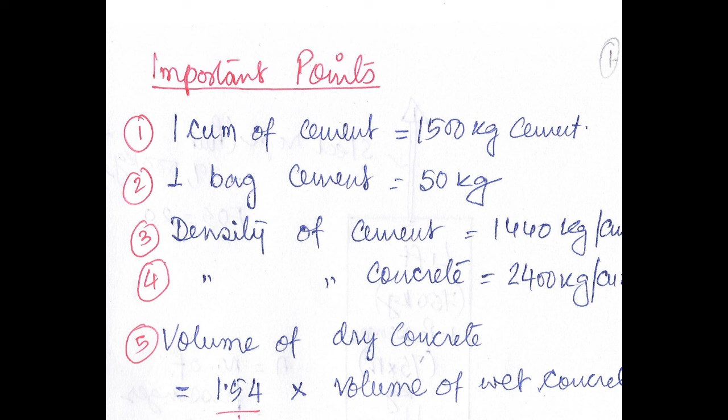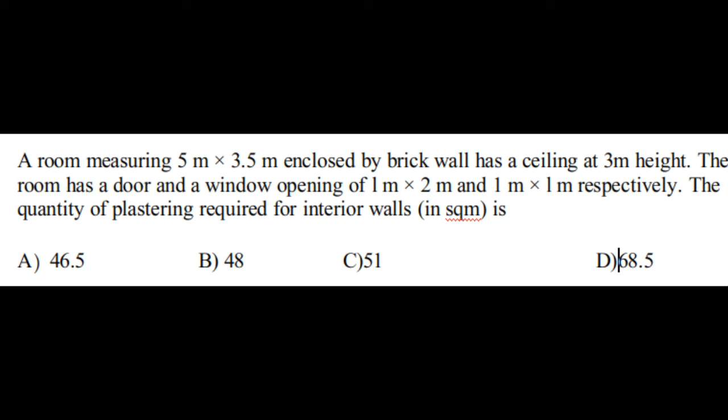A room measuring 5 meter by 3.5 meter enclosed by brick wall has a ceiling at 3 meter height. The room has a door and a window opening of 1 meter by 2 meter and 1 meter by 1 meter respectively. The quantity of plastering required for interior walls in square meter is: option A 46.5, option B 48, option C 51, option D 68.5.

Let us see how to solve the problem. In this problem, we have to find the quantity of plastering required for the interior walls. So now area of 4 walls is 2 into, within bracket, L into H plus B into H. So the calculation becomes 2. What is L? The value of length is 5 meter and the height of the room, that is till ceiling,

it is 3 meters. So 5 into 3 plus, what is the value of breadth? The breadth is 3.5, multiplied by the height, that is 3. So this calculation comes out to be 51 meter square. Let us name it as equation number 1.

Now area of one door is 1 into 2, that is length into breadth, that is 2 meter square. Area of window is 1 into 1, that is 1 meter square. Let us name both these values as equation number 2. Now what is the quantity of plastering required?

The quantity of plastering required is the total area of the 4 walls, 51, minus area of door minus the area of the window, because that we do not have to plaster, so that comes out to be 48 meter square. Now suppose this problem can be extended this way.

Let us discuss that. Suppose in the question it is asked that if the ceiling also has to be whitewashed or plastered, what would it be? So how would we do the problem? In that case the total area will be the area of walls, that is 51, which we have already got, plus what is the area of the ceiling?

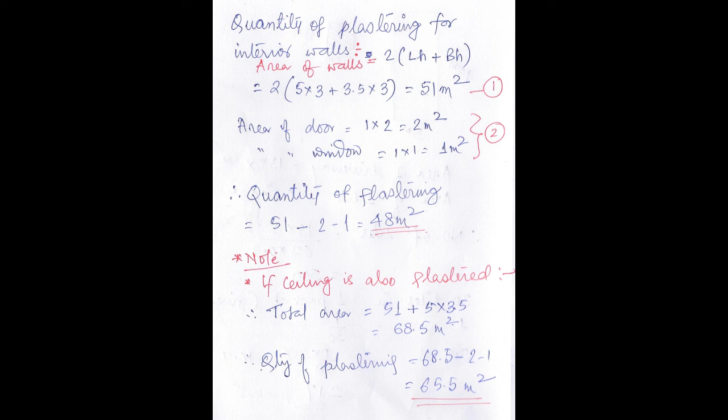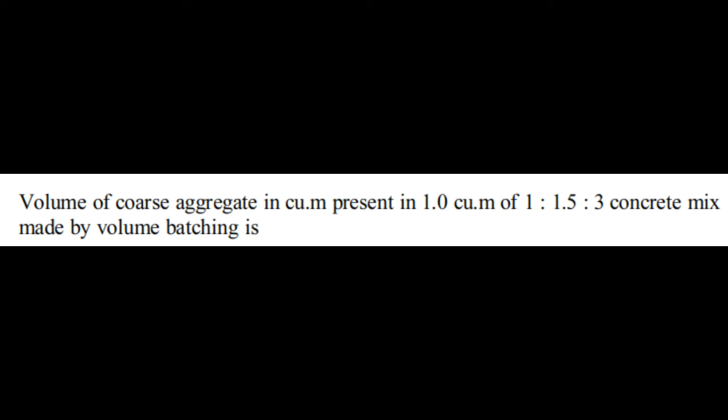Let us start. Volume of coarse aggregate in cubic meter present in 1 cubic meter of 1:1.5:3 concrete mix made by volume batching is? Let us see how to solve the problem. In the question, the nominal mix ratio is given as 1:1.5:3. It means that 1 is the part of cement, 1.5 is the part of sand and 3 is the part of coarse aggregate.

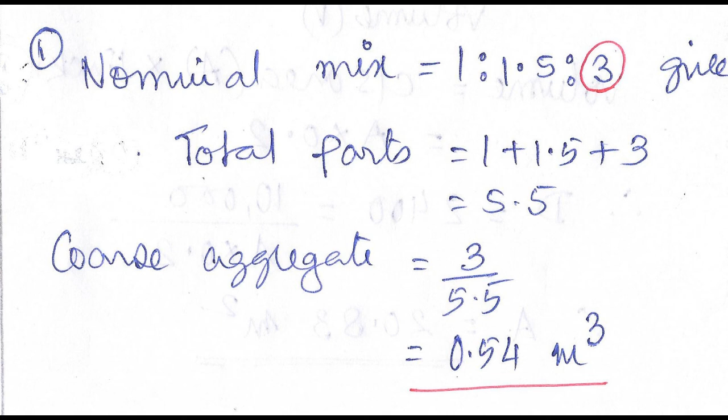So total parts will be 1 plus 1.5 plus 3, that is 5.5. Now the coarse aggregate part will be 3, so the volume of the coarse aggregate will be 3 divided by 5.5, that is, from the ratio we have got 3 and the total part is 5.5, that is 0.54 meter cube.

Next question: cement in cubic meter required for preparing 10 cubic meter of cement concrete in the proportion of 1:2:4 is option A 0.8, option B 1, option C 1.2, option D 1.4. Let us see how to solve the problem. In this question, the cement concrete is given as 10 cubic meter. Nominal mix is given as 1:2:4.

So total parts will be what? 1 plus 2 plus 4, that is 7. Out of this, what will be the part of the cement? Cement will be 1 divided by 7. Now to prepare 10 cubic meter of concrete, the cement required will be 1 by 7 multiplied by 10, that is 1.4 cubic meter.

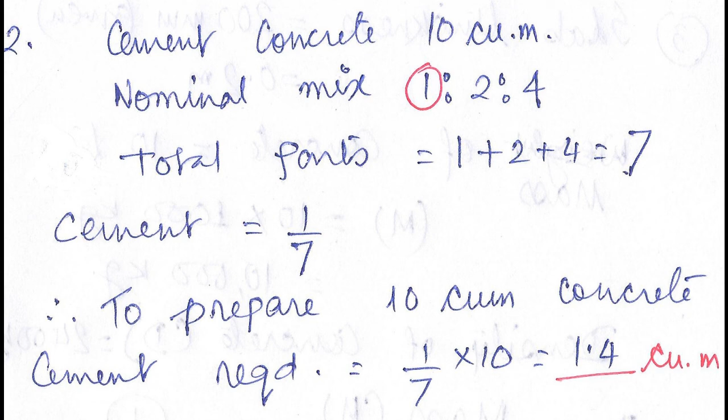The area of 200 millimeter thick slab in square meter that can be cast using the entire 10 tons of concrete will be: option A 10, option B 15, option C 20, option D 25. Let us see how to solve it. In this question, the slab thickness is given as 200 millimeter. Now 200 millimeter means 0.2 meter. Now mass of the concrete is given as 10 tons.

So let us denote the mass of the concrete as capital M. 1 ton equals 1000 kg, so 10 tons will be 10 into 1000 kg, that means 10,000 kg. Now density of the concrete, let us denote it as capital D, is 2400 kg per meter cube. As I have already told you, please remember these standard values: density of the concrete, density of the cement, all these values.

Now we know density is equal to mass by volume, that is D = M/V. Now what is the volume? Volume is equal to cross sectional area into the thickness. So let us say the cross sectional area is capital A, and the thickness of the slab is 0.2 meter. Now put the values in equation number 1: D = 2400 = 10,000 divided by A into 0.2. That gives us the area equal to 20.83 meter square. So in the question you mark option C, that is 20.

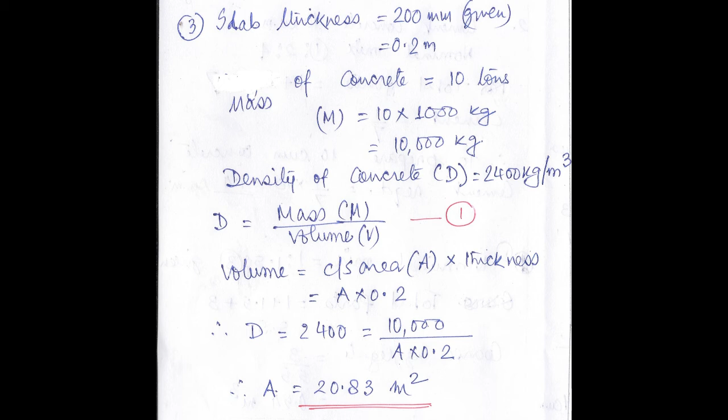Next question: calculate the volume of cement in cubic meter required for making 10 cubic meter of M20 grade cement concrete work, assuming the ratio of dry concrete mix to wet concrete mix is 1.52. Let us see how to solve the problem. In the question, the dry concrete to wet concrete ratio is given as 1.52. Please take a note, in this problem this value is given. So dry concrete will be 1.52 multiplied by wet concrete. The wet concrete is given as 10 cubic meter, so the dry concrete will be 1.52 into 10, that means 15.2 cubic meter.

Now nominal mix ratio for M20 concrete is 1:1.5:3. If you are confused or can't remember where I got this value, please refer to my video on IS 456 codal specification; you can find this table at 3 minutes 50 seconds. There you can stop and see the entire table. So please remember or memorize the table for these values. Now let us proceed.

Now volume of the cement will be 1 divided by 5.5 multiplied by 15.2. What is 5.5? 5.5 is the total parts: 1 plus 1.5 plus 3. And how much is the cement? Cement is the part 1. So 1 by 5.5 multiplied by 15.2. What is 15.2? That is the volume of the dry concrete we found in the first step. So that gives the answer as 2.76 cubic meter. So that is the answer.

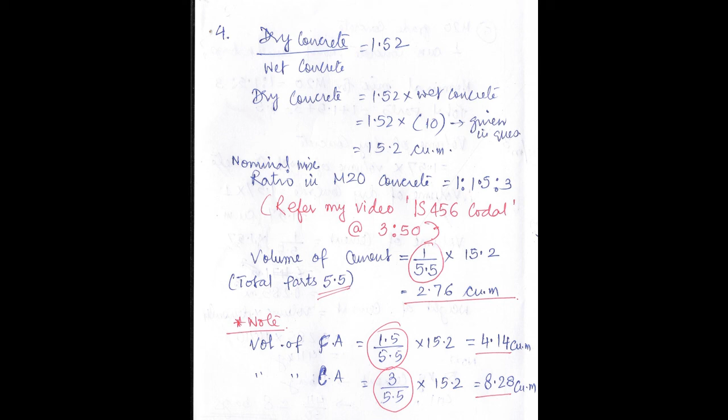In India, for 1 cubic meter of M20 grade concrete, the number of cement bags required is? You have to find the answer up to 2 decimal places. Let us see one last numerical from GATE and how to solve it. M20 grade concrete is given and we have to make 1 cubic meter of concrete. We have to find how many cement bags are required. So let us start. Nominal mix for M20 is 1:1.5:3, we already know; refer to my video on IS 456 codal specification, there you will find this value. Now total parts will be 1 plus 1.5 plus 3, that is 5.5.

Now volume of dry concrete will be 1.57 multiplied by volume of wet concrete, so 1.57 multiplied by 1, because it is given in the question that we have to prepare 1 cubic meter of concrete. So volume of dry concrete will be 1.57 cubic meter. Now volume of cement will be 1 divided by 5.5 multiplied by 1.57. The 1 we get from the ratio 1:1.5:3, from which 5.5 is the total parts, and 1.57 is the volume of the dry concrete. So volume of cement we are getting as 0.285 meter cube.